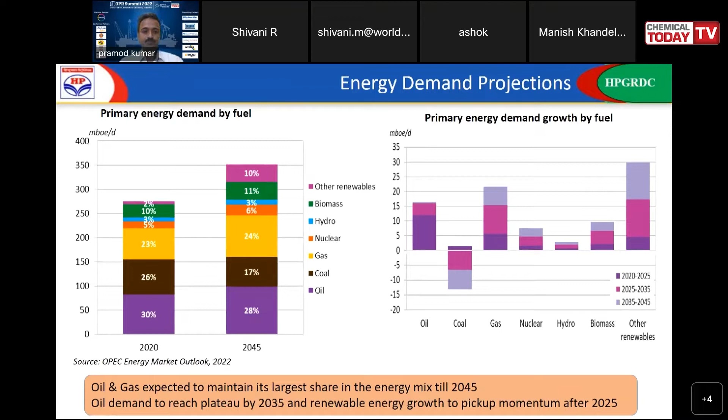Sorry. Something went off, looks like. My slide is not moving, it got hung up, looks like. Yeah, sorry.

Yeah. So the next is about the distillate capacity demand. Mostly the distillate capacity demands are coming up in Africa and the other Asia Pacific, that is mostly in the developing countries. Now, if we see the stringent product specification in the long term, the secondary unit capacities are mostly coming in desulfurization, then octane and conversion units.

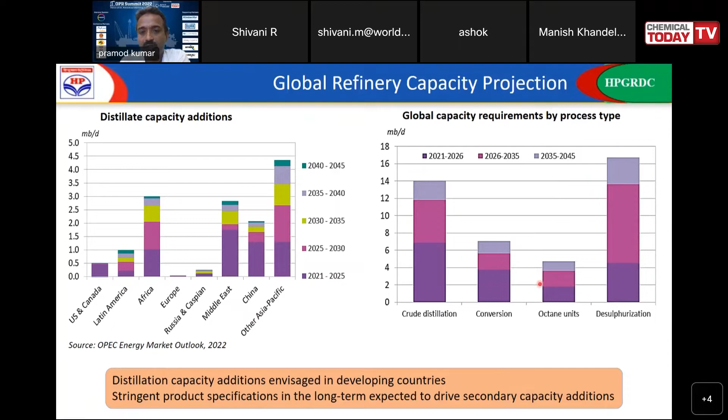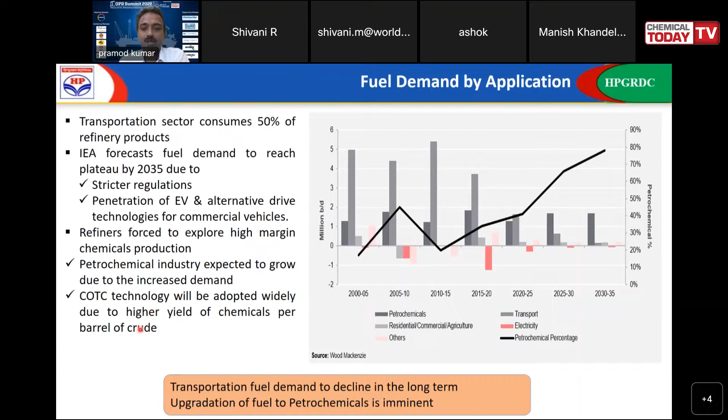Now, if we see the fuel demands, the transportation sector still consumes 50% of the refinery products. And if we see the IEA forecast, by 2035, the fuel demand is expected to reach a plateau because of the stricter regulations and the penetration of EVs. And in such situations, the refiners are forced to produce high margin chemicals. So that's what our previous speakers have told. There is a huge demand for petrochemicals, and now the buzzword is crude to chemicals. So we will be talking in the subsequent slides about those things.

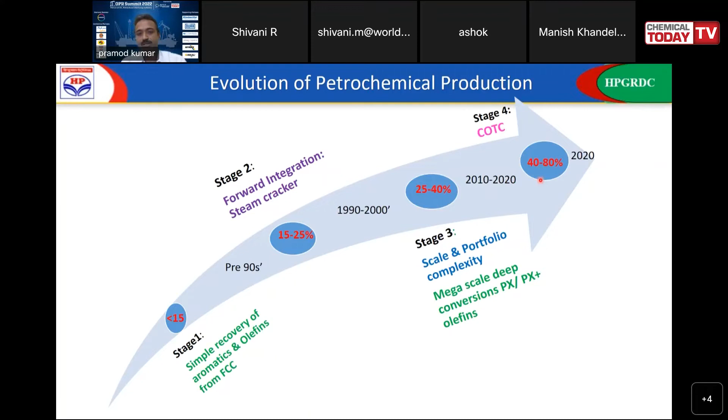These slides show the typical refinery configuration. We have the refinery, then a naphtha cracker and the aromatic complex. Based on this, streams like ethylene, butadiene, benzene, toluene, xylene, and propylene can be obtained. The right slide is very small, but what I'm trying to say is FCC typically makes around 7 to 8% propylene.

But with high severity FCCs, we can go up to 20% propylene. That's the role of FCC in the refining industry, to make higher ethylene as well as propylene. With high severity FCC, the total light olefins yields, including ethylene, propylene, and butenes, can go up to 40%, vis-a-vis the conventional FCC in the refinery, which produces 14% olefins.

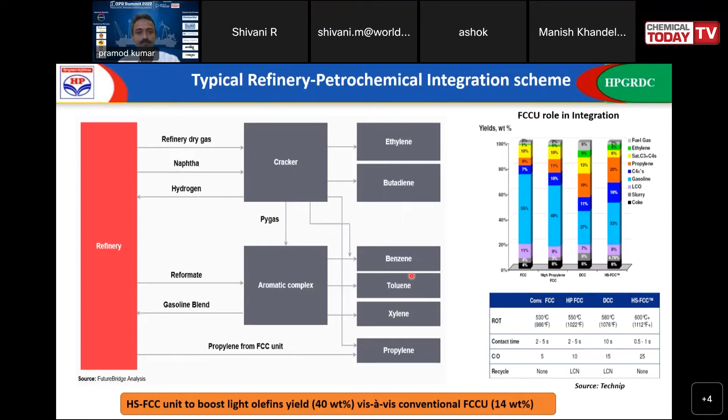This slide shows, since there is a growth of petrochemicals, the refinery has to move towards petrochemicals because demand for transportation fuels is coming down. So in such a scenario, how the world is moving, we will talk about in these slides. The easiest option is to go for the high severity or high olefin FCC. Typically propylene yield can go up to 20%, and the feed would have to be a very light VGO feed.

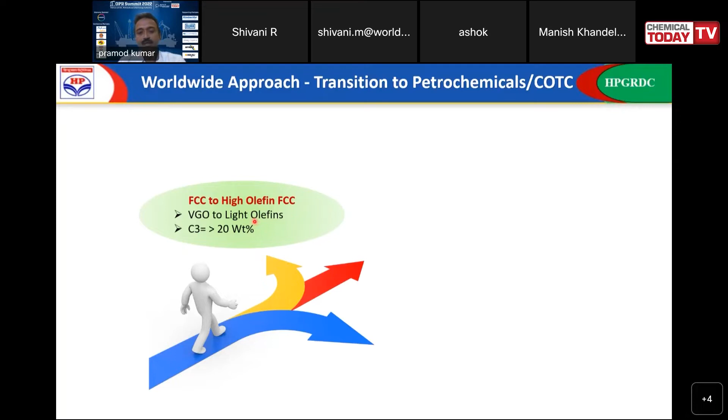The second integration which is doable is petrochemical complex integration, meaning high severity FCC plus the naphtha cracker or gas cracker, upgraded in the existing refinery configuration. So a refinery plus petrochemical complex can give petrochemical yield up to 40%. Beyond 40%, what we are talking about is direct crude to chemical, meaning the crude is taken and directly produces chemicals.

There are different ways. One is the steam cracker in Singapore by ExxonMobil, which has been commissioned. They take the crude and directly produce olefins like ethylene, propylene, and butene, and the claim is around 30% olefins can be produced. It is a single unit configuration, but of course it's a thermal process.

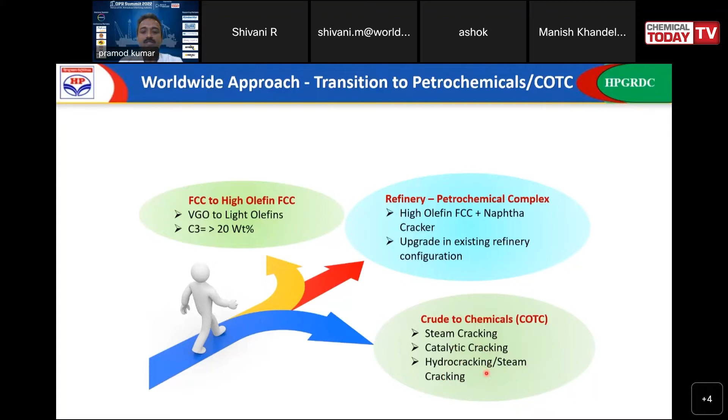Then there is catalytic cracking, like FCC-type configurations, which can make the higher olefins in a single step. Then there is hydrocracking and steam cracking integration. These can make more than 40% of olefins and BTX yield from the crude.

So this is the summary of the different pathways which can give higher olefins and aromatics. The top one I am showing takes the crude oil, which all OMCs and other companies have. They have the refinery, and they keep adding configurations like aromatic complexes and steam crackers, which can give higher yields of ethylene and propylene.

The next is where the crude oil can be taken directly into the steam cracker to produce ethylene, propylene, and butadiene. But the limitation of this technology is that it can only take light crudes. Next is the COTC complex that can take mixed crudes, having steam crackers and an aromatic complex that can make BTX and higher ethylene, propylene, and butadiene.

For the next two technologies I am talking about, the licensors are Aramco, Lummus, CLG, and another is Aramco, Axens, and Technip. They came up with two things: one is thermal crude cracking to olefins, and second is catalytic cracking of crude to olefins. Their claim is that using either the thermal route or the catalytic route, they can make more than 70% petrochemical feedstock.

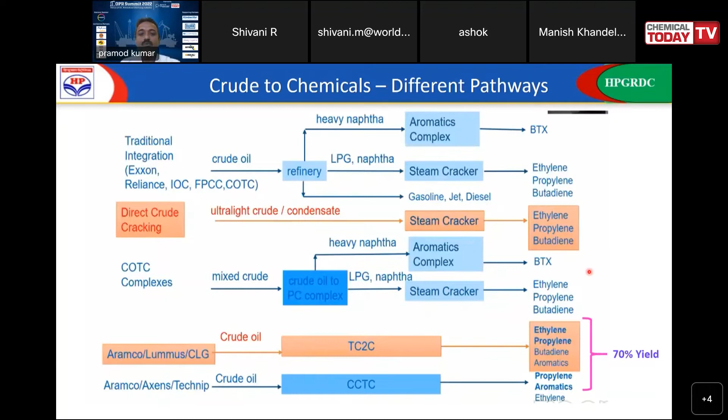Normally, in a typical petrochemical complex, the feedstock mainly comes from naphtha or gas, and the typical yield of naphtha and gas is around 15 to 20%. So the cracker capacities are around 1.5 mmTPA. But in crude to chemicals, there are various references like Hengli in China, Jiangsu, then Zhejiang and Shandong. The crude to chemicals capacity is 20 mmTPA, which is refinery capacity.

So COTC complexes themselves are coming up at such sizes, beyond the 1 to 2 mmTPA we were thinking about. These are all going towards 20 mmTPA COTC complexes, which are running in China. And the yields of petrochemicals directly from crude oil are more than 40%, even 50 to 60%. Even Aramco and SABIC have announced their JV for a 20 mmTPA complex.

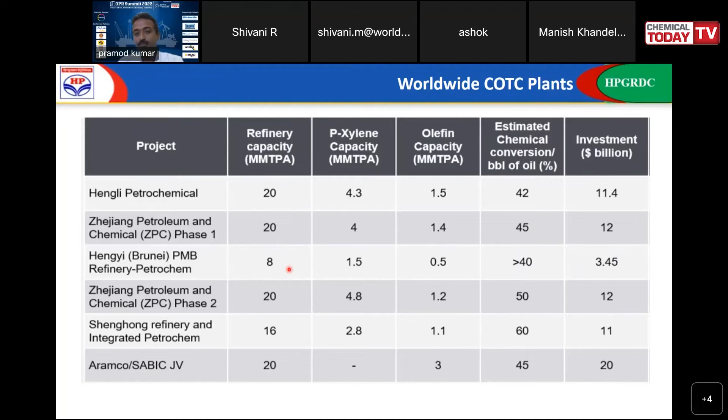But these COTC technologies are basically an integration of available technologies in such a way that they produce more than 40% petrochemical yields directly from crude oil. And the investment figures are within the range of setting up refineries of such capacities. So now, what is beyond COTC? We'll see in the subsequent slide.

COTC, as we have seen in the previous slide, is about the integration of many units. Now this is one reference from the literature which talks about a one-pot configuration, where only one reactor takes the crude and makes the petrochemicals. This literature talks about 30% olefin yields, with water co-feeding and other things to take care of the higher coke yields.

Now in HPCL R&D Center, we have also developed a single-step process wherein we directly take the crude and it can produce more than 40% petrochemical yields, meaning olefins and aromatics. This process has been patented, and we are scaling it up to put up a demo plant. The advantage of this process is that there will be no CDU, VDU, FCC and so on. One unit will directly take the crude and produce the petrochemicals.

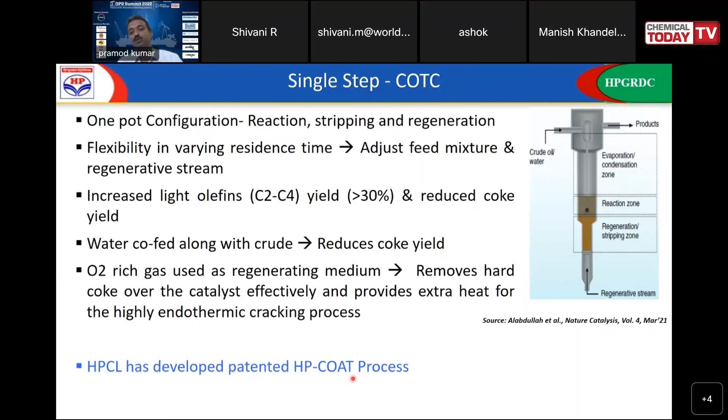Next we'll talk about the other areas, that is decarbonization. Our previous speakers have all talked about the COP26 meet, where the country has to achieve net zero by 2070. These data are all available, so I will not get much into them. I will come straight to the key things in these areas, what people are doing, and what we are doing at HPCL R&D.

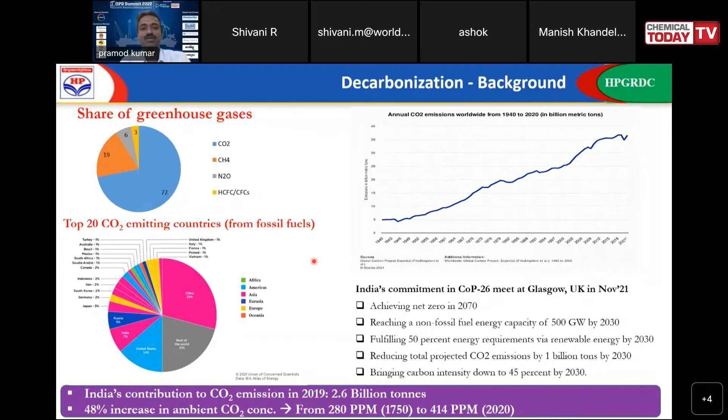If we see the new trends, we are all talking about the carbon neutral refinery. That means CCS, where CO2 has to be captured from refinery emissions. A lot of commercial units are coming up, and HPCL is also putting up a demo plant for capturing CO2 in the refinery. There are other ways too, like converting CO2 to fuels and chemicals.

We are also working on that, and we are trying to convert the CO2 to olefins as well as methanol. Hydrogen production from methane without CO2: in the refinery we have the well-known SMR process which produces hydrogen, but in the course of producing hydrogen it emits CO2. To produce 1 ton of hydrogen, almost 10 to 11 tons of CO2 is produced. But in R&D, we have developed a process at the lab scale, and we are trying to scale it up.

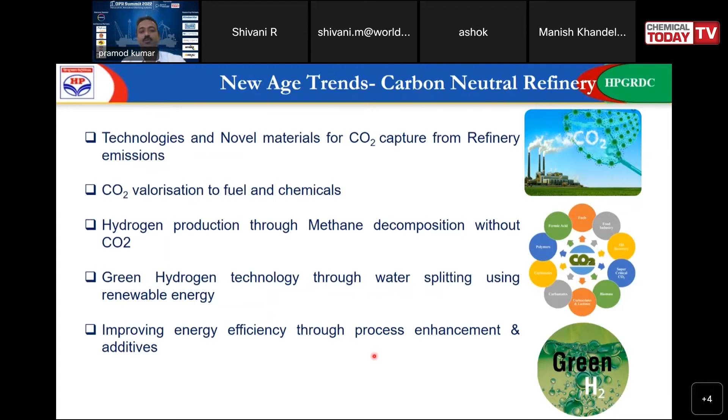If we take methane or natural gas, it converts to hydrogen and there is no CO2 production. So it's a CO2-free process. Whatever carbon is there, we are converting into carbon nanotubes. That process is now being scaled up. We are also working on water splitting to green hydrogen. Those are all at different scales of lab development. And we are doing various research in energy efficiency through process enhancement and different chemicals and additives.

The next is renewable energy, another way to decarbonize our sector. HPCL is the only OMC which produces 1G ethanol, and we have 2 plants running in Bihar. Then 2G bioethanol from agricultural waste; a lot of technologies and plants are coming up in India now. We have our own process, HPSF, a steam-assisted single-step process, which is being developed, and we are scaling it up towards a demo plant.

We have also developed a CBG process; there's a lot of talk about putting up CBG plants. We call it HPRAM, a rapid acid methane production technology. We have the pilot plant which can take biomass, and our CBG VPSA technology to purify the gas. Another area is biojet, where used cooking oil can be converted to ATF. This technology is now ready for demonstration, and we are doing the engineering to put up the demo plant.

Another is drop-in fuel from biomass. Biomass can be converted into gas or into 2G bioethanol, but there is a process where we can do hydropyrolysis and convert it into a drop-in fuel. That means it can produce gasoline and diesel, which can directly be used as fuel. There also we are actively pursuing and developing these technologies at lab and pilot scale.

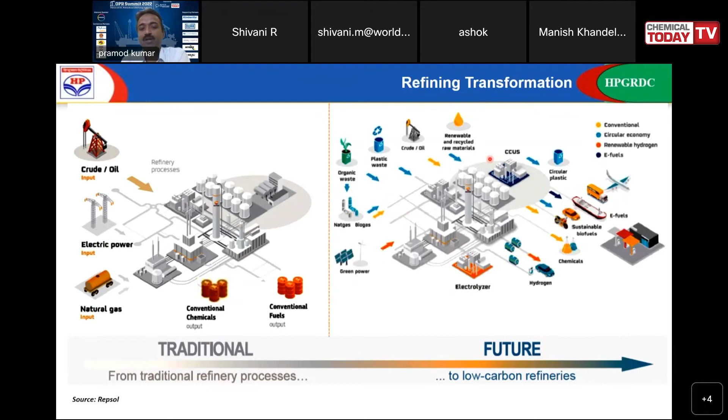Looking down the line to the near future, the traditional refinery has crude oil and power and produces conventional chemicals and fuels. In the future low carbon refineries, feedstock will come from pyrolysis, plastic oil or biomass, gas, water can be used to produce hydrogen, and we can have e-fuels, then CCS. All this integration will go into the future low carbon refinery.

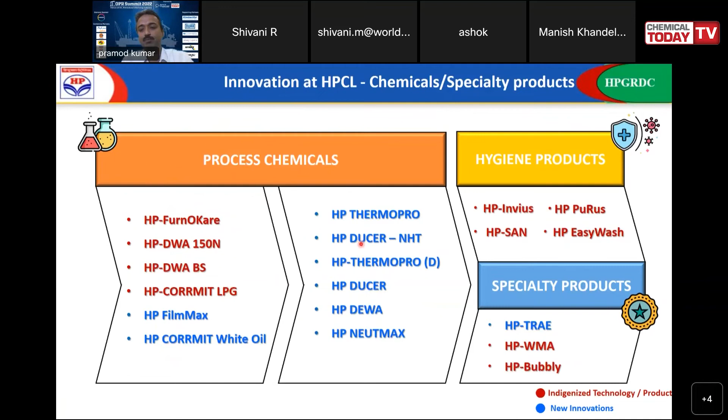This is just a crisp summary of the innovation at HPCL R&D in terms of technologies, fuels, catalysts and bioproducts. I won't go into too much detail because these are all available on our website. We are also working on different chemicals used to improve efficiency in our refining process and petrochemicals. But the main 2-3 technologies and products I'll discuss are related to improving petrochemical yields and decarbonization.

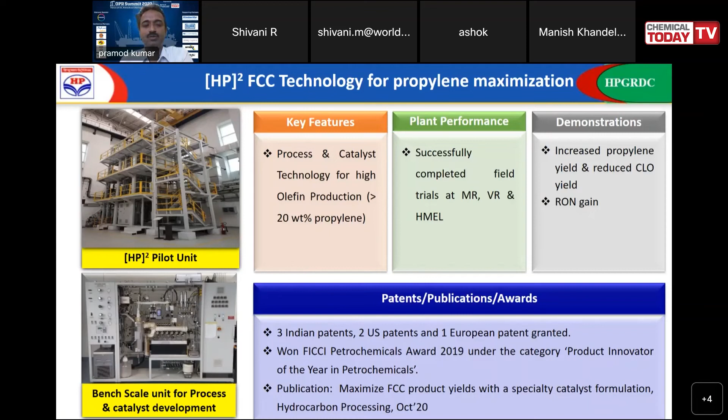The best part of the technology is that it doesn't produce any residue, unlike the existing high propylene FCC technologies available in the world now. The catalyst has been successfully demonstrated at our refineries and HMEL. For the technology, we are looking for a location and capacities where it can be demonstrated. We have got patents and awards for developing these technologies.

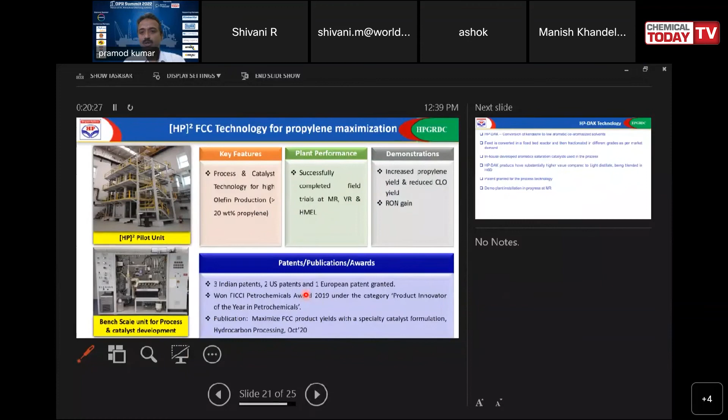I think my slide got a little hung up, just one moment.

Yeah, so I think my slide is visible. Can somebody confirm? Yes, sir. It is visible.

Yeah, sure. So another technology which we have developed is de-aromatized kerosene. It is basically a conversion of kerosene to the de-aromatized solvent, and it uses a fixed bed reactor. This catalyst has been developed by us. It produces basically 2 grades of the de-aromatized kerosene.

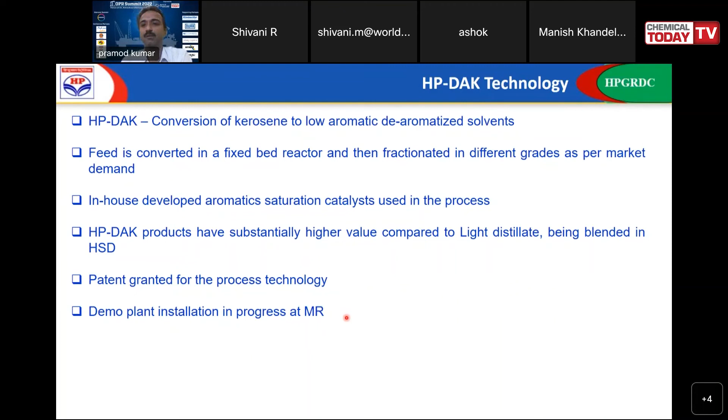For this technology, we are putting up a demo plant of 52 KTA at our Mumbai refinery. The plant is now under installation, and by end of this year, we will be making this unit on stream. That will produce the 2 grades of de-aromatized kerosene, which is a key demand in our upstream industry as well.

Next, we are all talking about blue hydrogen. We produce gray hydrogen in the refinery, and if we capture that CO2, that is called blue hydrogen. Now, this is a HiGAS technology that works on process intensification, wherein a 23-meter column can be reduced to 2.5 meter, like a rotating device. We have commercialized this at our Vizag refinery for fuel gas H2S removal.

Based on this technology, we are now trying to capture CO2. This technology is now in the engineering stage, and we will be putting it up to capture around 3 tons of CO2 from the HGU unit, which may go on stream in another 2 years. That's another approach from the HPCL side to decarbonize the sector.

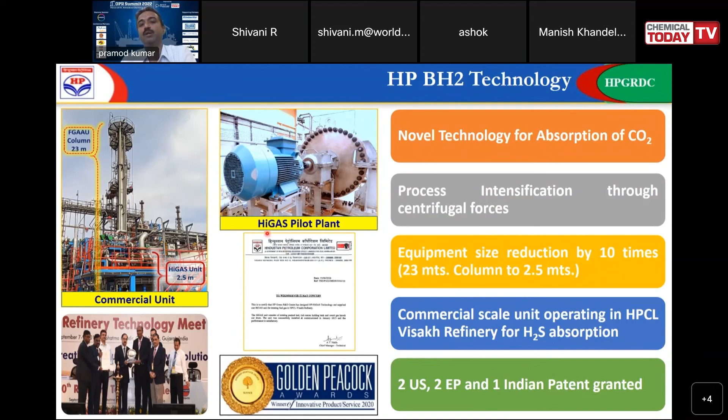So in summary, we are seeing the fuel demand is going to reach a plateau by 2035, but there is hope. The hope is that we have to convert crude to chemicals, either through integration or a standalone plant. Of course, crude to chemicals is the need of the hour, but there is not a single solution for all refineries; it depends on the configuration of the particular refinery.

For naphtha-centric and diesel-centric refineries, the configurations would be different. For naphtha-centric, it can be a cracker and FCC. For diesel, it can be a resid upgradation unit followed by crackers and reformers. So existing refineries have to shift their configuration towards petchem with the addition of CCS. And COTC is expected to impact the petrochemical industry.